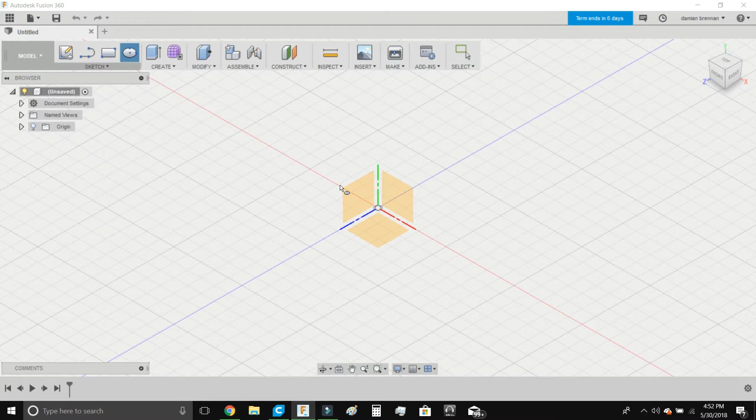I've done this a few times and I finally got it right. So first we're going to do an ellipse, and we're actually going to do it on the bottom plane. The dimensions of our lighter case are 25.5 by 14 millimeters.

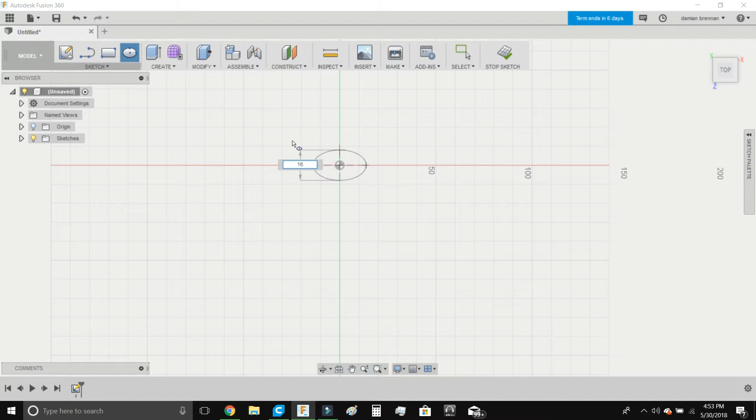But we're going to give it a 1 millimeter wall, so we're going to have to give it 2 millimeters on each side. And then we're going to have to do that by 16, so 27.5 by 16 for the base. We're going to extrude that by 1 millimeter.

And we're going to do another ellipse. You go down to sketch. And we're actually going to do it on this plane right here.

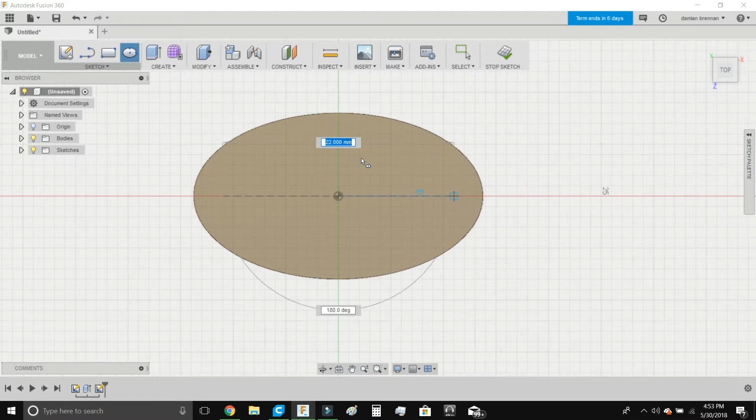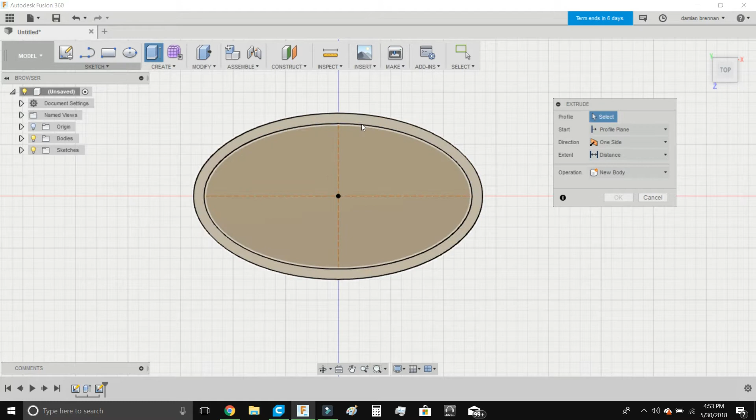We're going to have to do 25.5 for the actual inside width. And we're actually going to have to do 14 for the thickness. So we're actually going to have to extrude this wall by 67 millimeters.

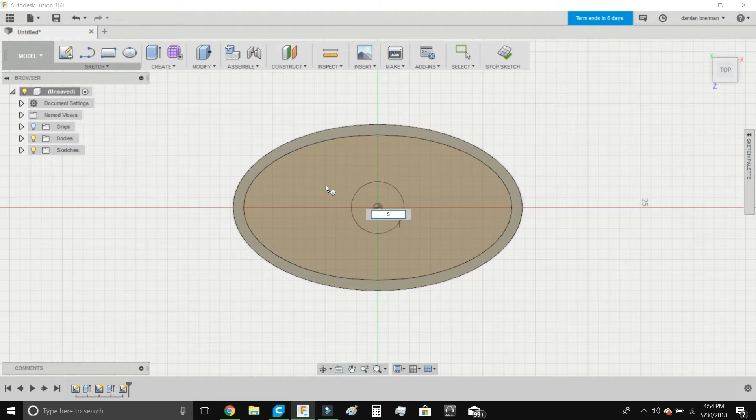And while we're here, it's going to be easier to put a little hole in the bottom so you can pop out the lighter if it gets stuck. Circle, center point, right here, you're going to give it 5 millimeters. And we're going to extrude that by 1 millimeter, negative 1. Negative, you go down, positive, you go up.

And so we got that part of the lighter done. So we got the front of the lighter right here. We got this whole lighter case right here. Now we need to customize it.

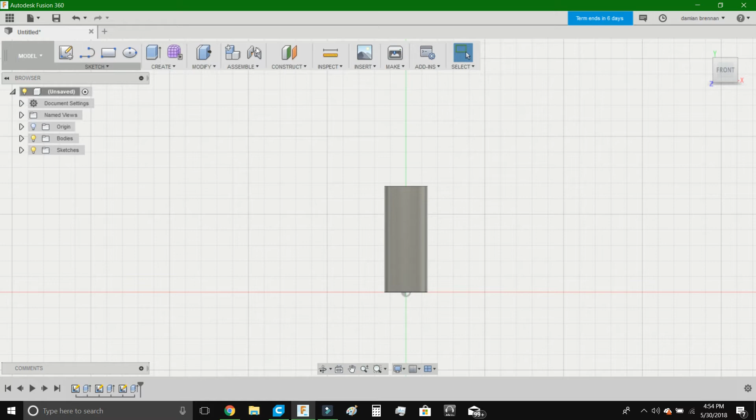I already did this a second ago, but it wasn't recording, so I had to redo this whole thing. So we're going to go to the front. We can click on the hotkey S and type in text. I'm going to put my name on the front of the lighter case, so everybody who finds this lighter knows that it's mine. So I'm going to put Damian.

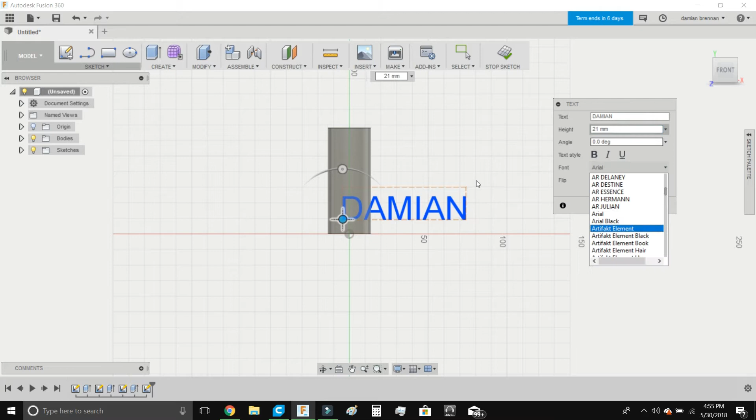I'm going to go down to 21 millimeters. I'm actually going to go to Hollywood Hills for the font. And I'm actually going to rotate this and move it. So we got that, so you can click OK.

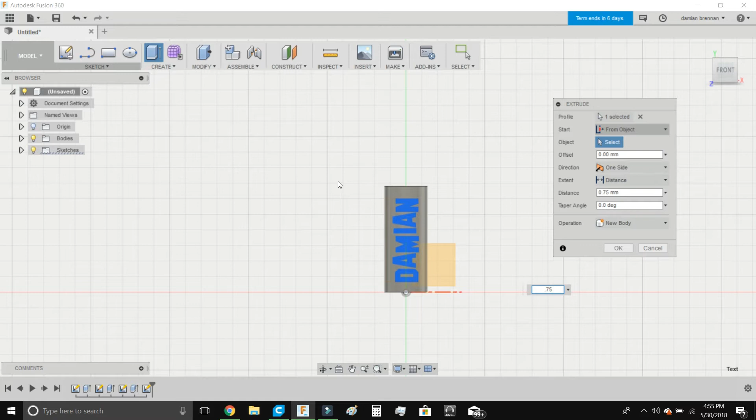Now we're going to extrude that. I'm going to click on this, and we're going to start from object. And that object will be this object, obviously. And we're going to do it by 0.75. And we have to make sure that the body is clicked, so we're going to hit OK.

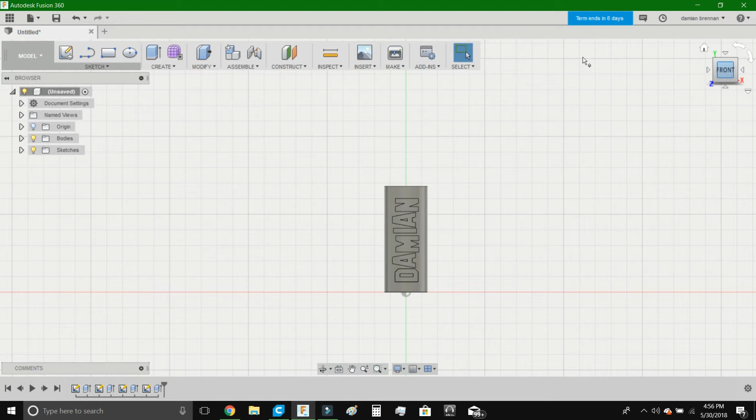Now we have my name on the front of the lighter case, and we're actually going to turn this around as well. So we're going to hit modify, move copy. This software is running a little bit slow since I'm recording the screen. I'm going to take this, turn around 180.

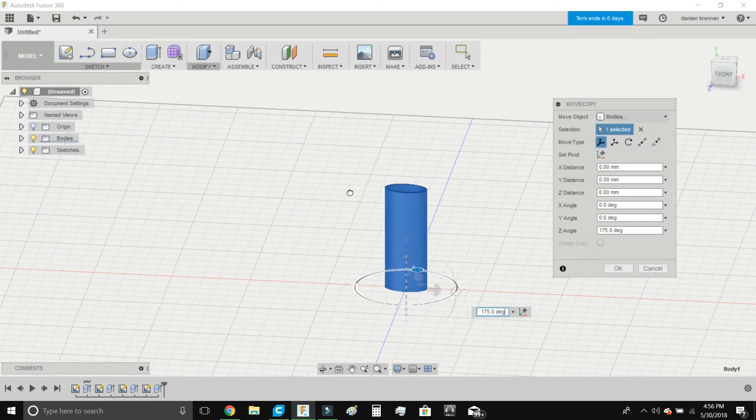We're going to hit OK, and I'm going to insert an SVG. I'm going to do it on this plane right here. And select SVG. I'm going to be basic, click marijuana leaf.

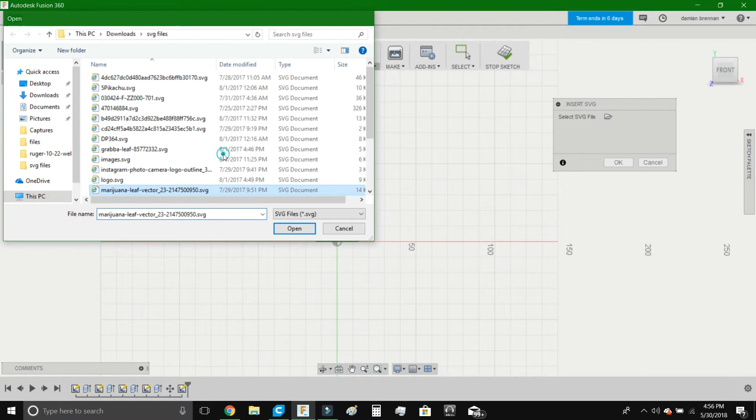We're going to make this a little bit smaller so it would fit. Make it a little smaller again. Okay, so we have a marijuana leaf.

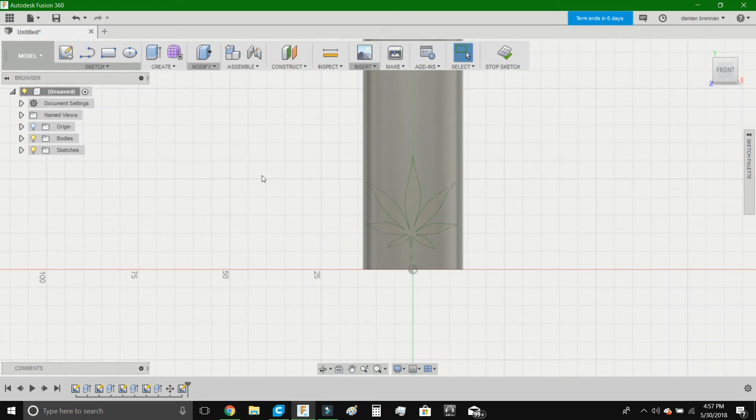We're basic, so we have this SVG file right here. We're going to extrude it. Going to click on this, you're going to have to start from an object. We're going to have to click on this object right here and do 0.75 again.

And then it's going to take a good second for this to compute, because for whatever reason, when you insert an SVG file, it takes a good bit of computer processing power to actually translate it onto an object. Not sure why, but this is pretty demanding software. So we're just going to give this 1 second.

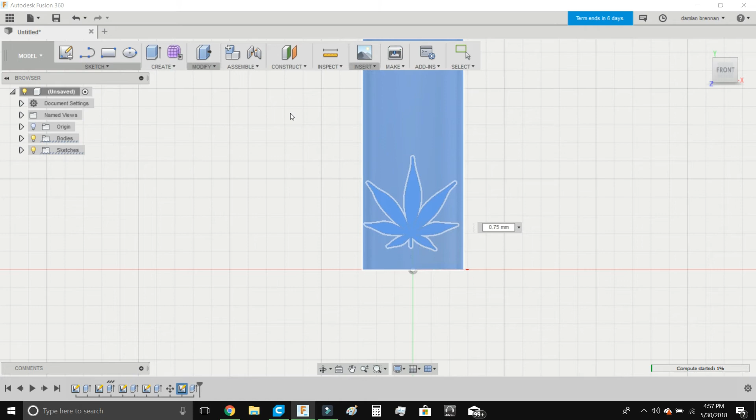Okay, so now that this is done, look at it. We got everything we want. So we're going to hit make 3D print.

I'm going to click on the objects. I don't want to send it to 3D printing utility, so we should be fine. So I'm going to click that and hit OK.

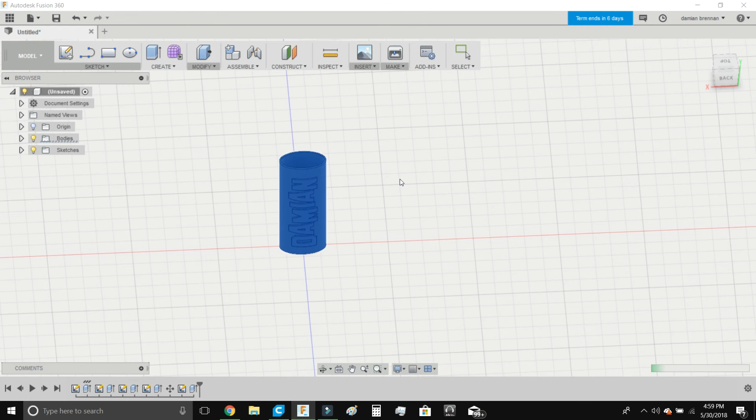And we're going to name it Damian lighter and hit save. And we're going to go over to Cura and put it in. This was a different lighter case, so we're going to hit open file, Damian lighter.

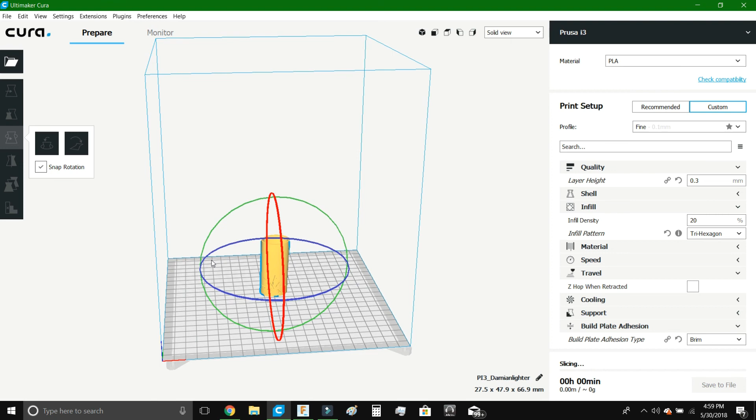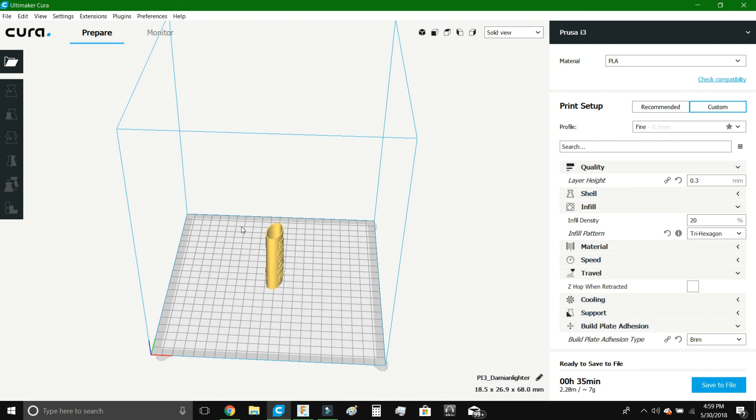We're obviously going to have to rotate this. And I want it to face this direction. Oops, not that way. I'm going to make it face that direction. Make sure it's all level. Okay, so we're making it face that direction.

We're actually going to have to scale it up, because whatever measurements I have, it needs to be increased by 4%. So we're going to send this to a 3D printer, and I'll show you the final product in a second.

Here we go. Correct size, perfect dimension. Pretty snug in there. That's a little hole in the bottom.